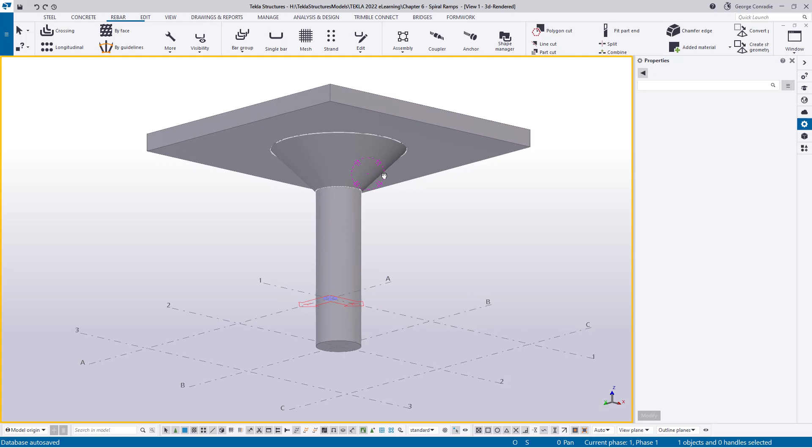In today's video, we're going to look at conical column headers or slab thickenings for the column header. If I rotate my 3D view, we can see what we're dealing with. So we've got a column, 1,000 millimeters in diameter.

Above it, we've got a column header, a shear column header. I've used the ELD in the profile catalog, so if we click on it, it's under circular sections ELD. Instead of having an elliptical shape, I've made the D and the R the same value so they turn out round. It's 1,000 at the bottom and 3,000 diameter at the top. Then we just have a simple slab on top, 400 millimeters.

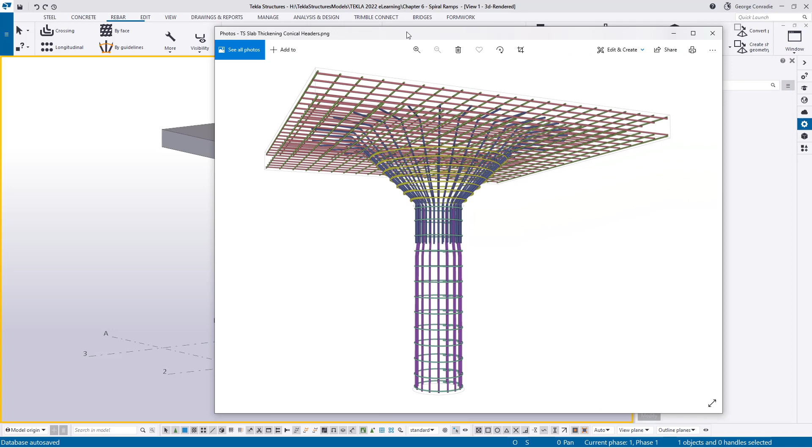So we're going to attempt to reinforce that. What I'll do is drag in an image. This is a screen capture from when I did my prep for this video, I just grabbed the screen capture because I didn't really have a good example.

Basically what we're dealing with: we've got a column with some ligatures around, and then the column has a cranked bar, and the main bars that go up the cone lap with the cranked column bars, and then it extends right through to the top layer of the slab, forming the third layer of the slab. We also have some distribution steel going horizontally around the cone.

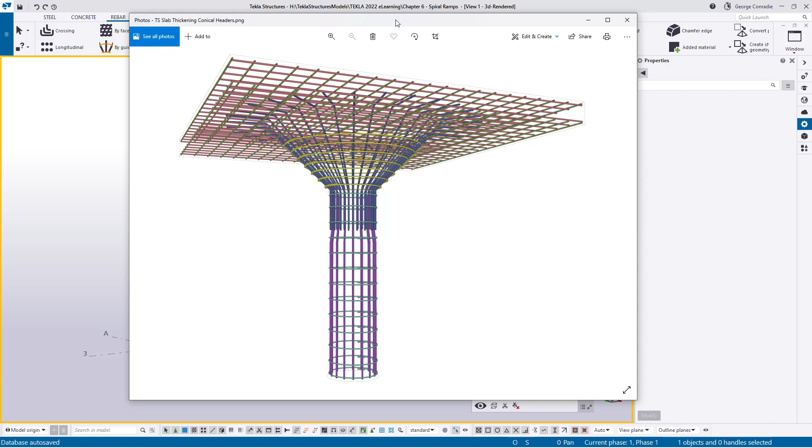This is quite a complex exercise in the sense that the geometry is not simple, and I am going to use all three rebar types - single bar, rebar groups, and rebar sets - to accomplish this. Sometimes you do need to revert to more than one method to solve your solution. Let's see how that's done.

I think for this exercise, what I will do is start with a cone - we'll do the conical part first. I'm going to open up a view on gridline 2. If I go to my views, I'll just grab gridline 2.

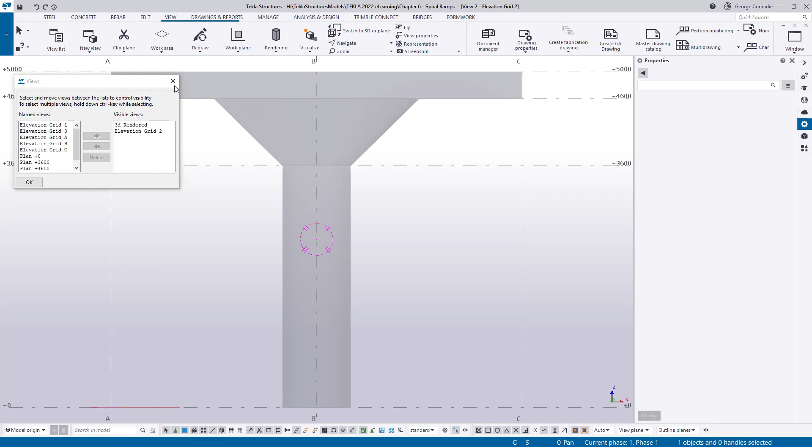Also, if you look at the way I've put out the grids, we've got a 0 level here, a 3.6 meter at the base of the cone, and a 4.6 meter, which is a meter difference to the top of the cone, which is the soffit of the slab, and then the slab at 5,000.

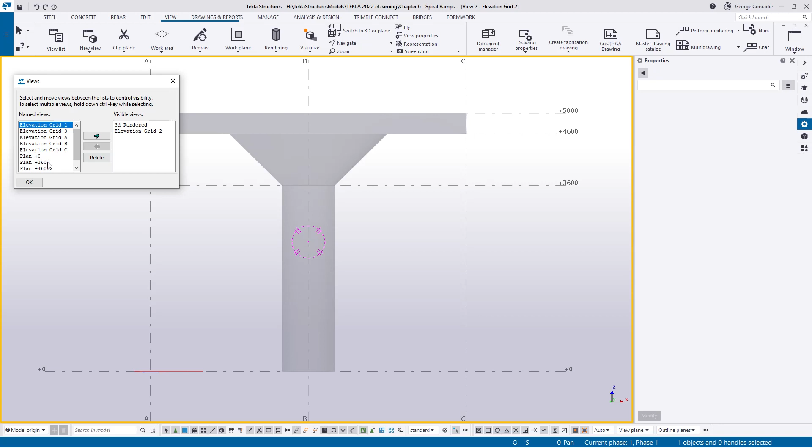So to work with the cone, I'm also going to open up a layout on 3.6 and 4.6. If we go to the view list, we'll grab 3.6 and 4.6 and drag them across as well. Then what I'm going to do is go back to the grid line 2 elevation.

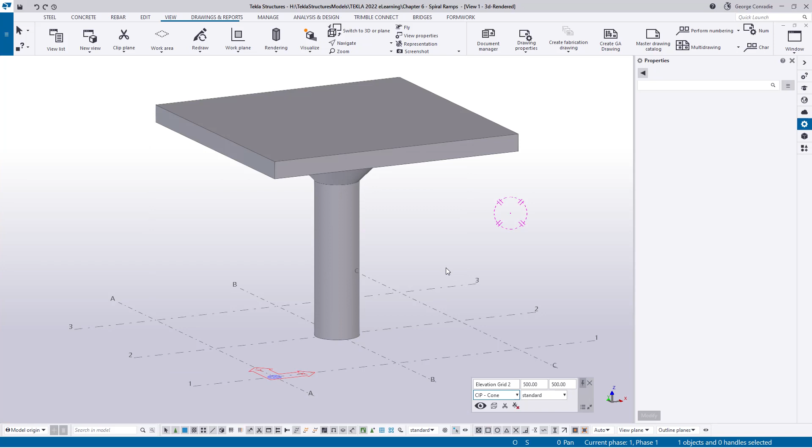Under the visibility group object, I will also isolate the cone, so we only see the cone. We might as well do it for the other two views as well - make sure we've got the cone in here, and also in this one. Great stuff, and I'll go Control P.

So in this one, you can see this is 3.6 - we're basically working at that level where that dotted circular line is. And if we go to the elevation on the side, this is the 3D view, I'll kill that one for now. At 4.6, we're basically working on this level of the outer cone.

Right, okay, so let's go to the elevation - that's the easiest place to start. What I'm going to do is start with the horizontal bars. Now with the horizontal bars, it's going to be 12 millimeter diameter bars.

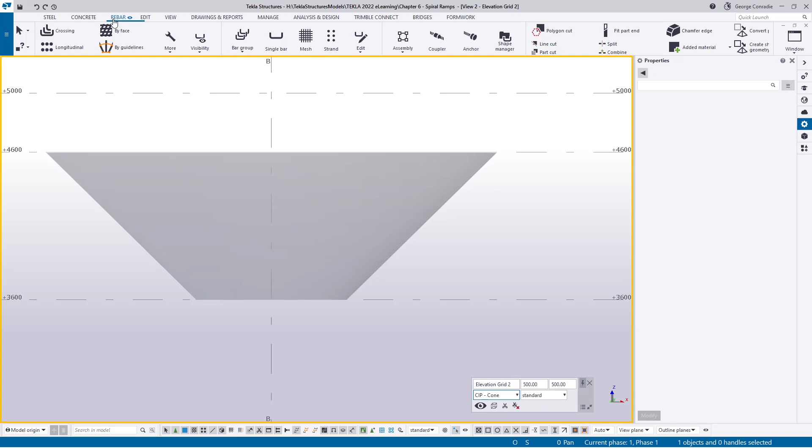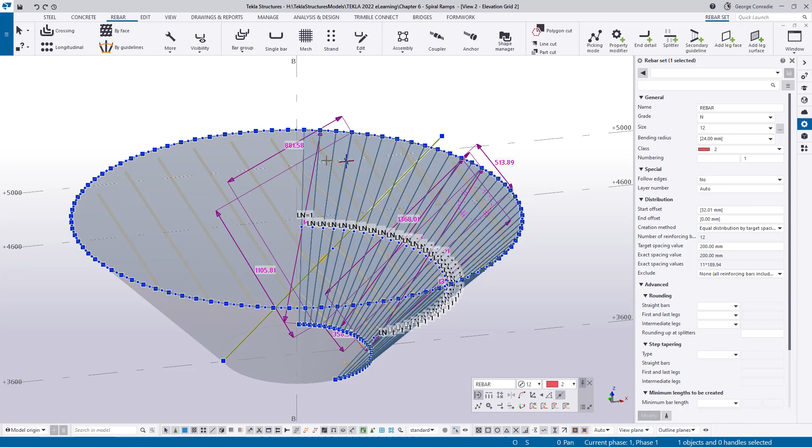It's quite tricky because if we put in a crossing bar and just click there, we get a really funny shape. You can control it by moving your offset around, but it generates - let me show you. If I go here and switch on our visible leg visibility and click on the bar, it does generate an immense amount of faces, and that's what we want to manipulate at the end of the day.

So what I'm going to do is just delete those. I'm going to go Control P, so we're back on the elevation straight up again. For this exercise, I'm actually going to use by face. When I go to face, you can see as we hover around these faces, it actually gives you the direction of the bar.

If we pick the one just off center from this and hover towards the bottom point, you can see we get vertical bars. Or if we go towards the side, we get perfect horizontal bars.

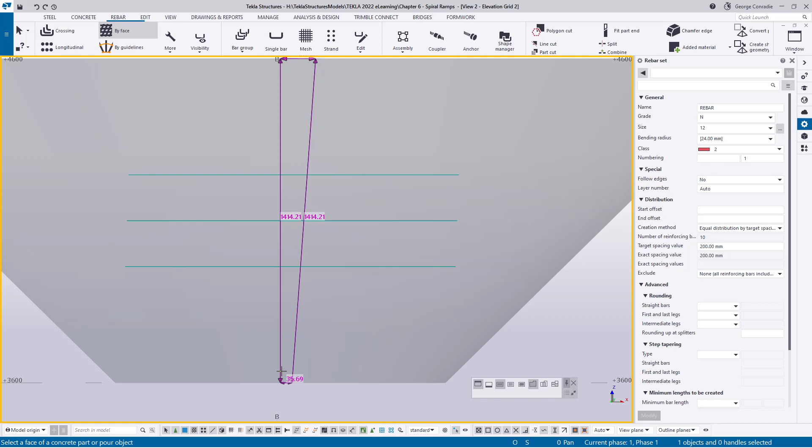Now, if I click that horizontal, Tekla will generate, and I'll just quit out of the command there. Tekla will generate this sliver of reinforcement because it's only picked one face, and that is okay.

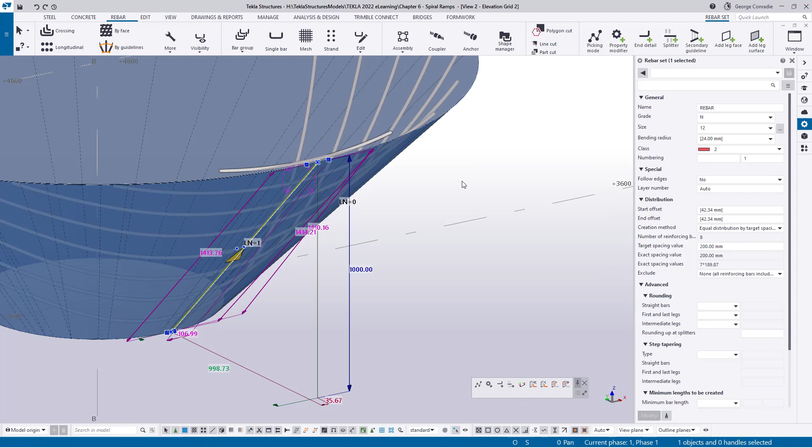Now that we've got that selected, what we can do is go up to the top here and say add a surface. If we click on the outside surface, we then add surfaces right around. The important thing is we now have two faces on top of each other here. We've got the surface here, but we've got the face here, so we've got to click on the face.

Just make sure that you select the actual face. If you click on it, Tekla will tell you it's actually a rebar set leg face, and you can just delete it. And that was the wrong one.

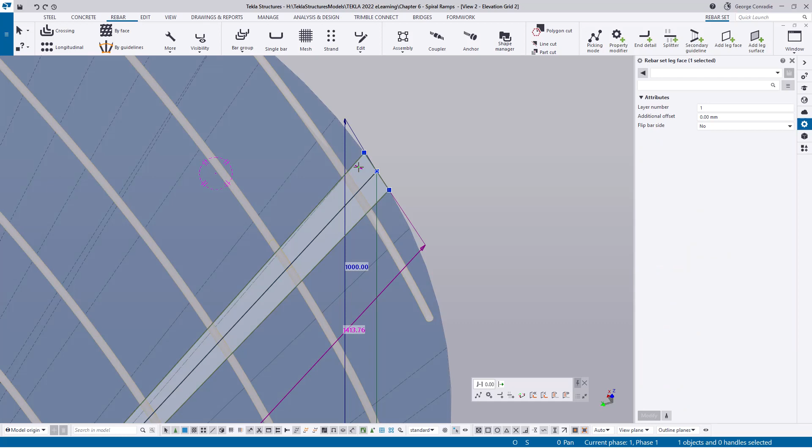So if we just click on the bar again, it's so important to make sure that you select the right one. It will actually highlight. So if you look at that, you can see it's actually now highlighted. And then if you delete that, we're left with the surface with the bars in it.

And the reason why they're so funny is because the guideline is at the slope of the cone, and rebars always produce perpendicular to that. So that's the next step in this exercise. We need to fix that up.

So if I just do a redraw to get our cone again, and I click on our rebar, we can see the first step, I'll switch off the faces, is to get that guideline perpendicular. So what we can do is in this elevation, we can just drag it so it's perpendicular or in line with the grid line, vertically up.

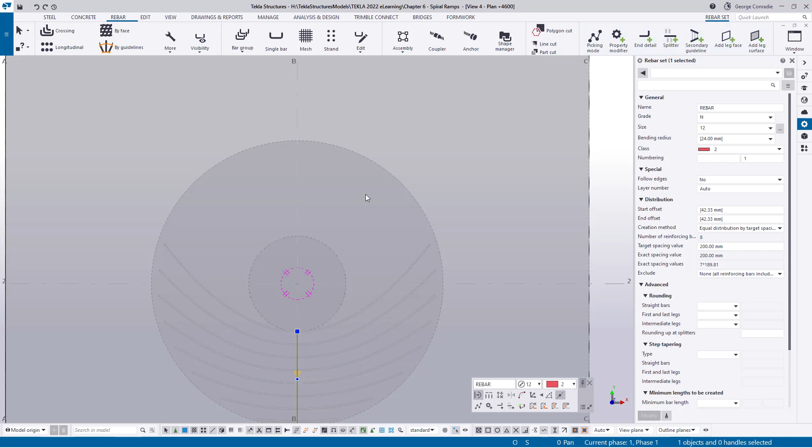And then if we go to the top view of the 3.6 level, this view, if I grab this one, it is the bottom. I can grab it to the middle of the column. And then if I go to the 4.6 meter one, I know it's this outside one. I can drag that to the center too.

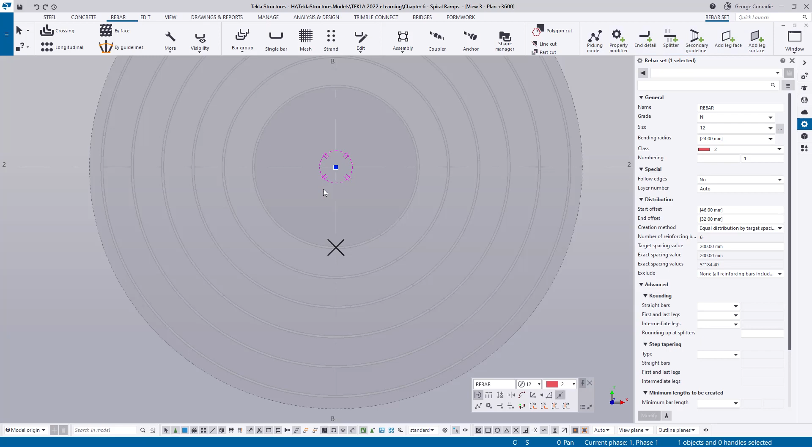And as soon as I do that, you can see how nicely that reinforcement's actually, and I'll just do a redraw, how it's gone horizontal for us. So if we look at the elevation, we can now see we have this guideline exactly in the middle of the column going up and down. So all this reinforcement is then being created perpendicular to that, and that gives us this perfect circular reinforcement.

Now, at this point, we can't see where it starts and ends, so it's a perfect circle. We need to split this up into workable bars.

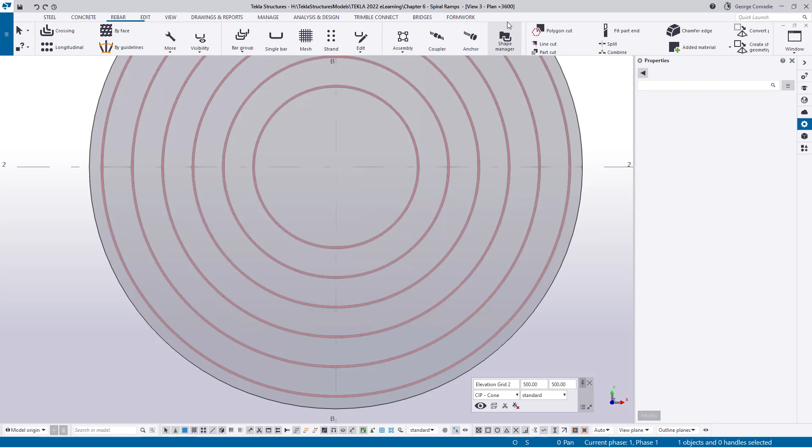So if we go to level 3.6, which is the bottom of the cone again, see my title bar at the top there, we can now split this. So if I click on this bar, I can then go splitter, and I can make sure that I load my defaults. I want a standard lap.

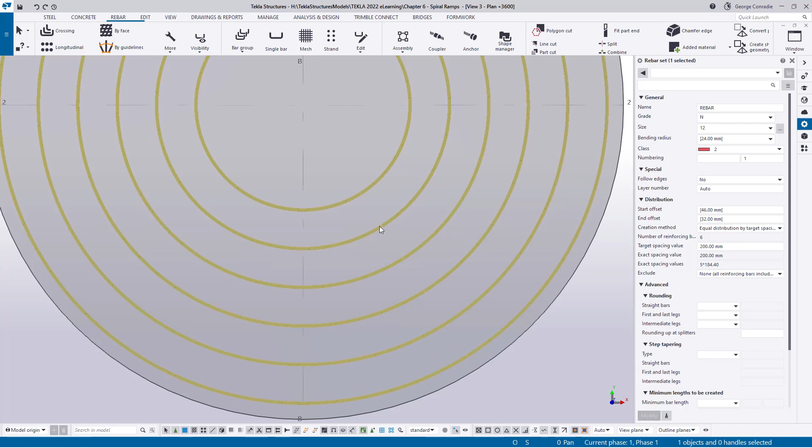Now what I can do is, actually we can't see the bottom of the concrete here. So what we can do just before we split it, let's just temporarily select this reinforcement and say give us 150 offset on either side, just so we can see the concrete line. As soon as I do that, I can see the concrete line. We'll rectify that in a minute.

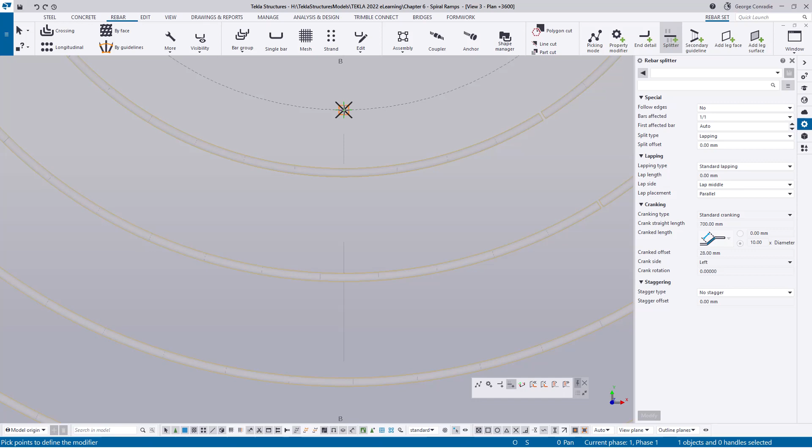So if I click on the reinforcement now and I go to splitter, I want to split the bottom, start at the bottom, so make sure you're on 3.6, and then we can pick this point of the concrete here. And before we pick the other, maybe I should just mention now, the reason why I can actually split is because I'm in the multi-point mode.

Maybe what I should do is just show you, if you are in this mode, you cannot split. Even if you click, Tekla doesn't do anything. You have to be in multi-point mode when you're working with tapered or guideline bars.

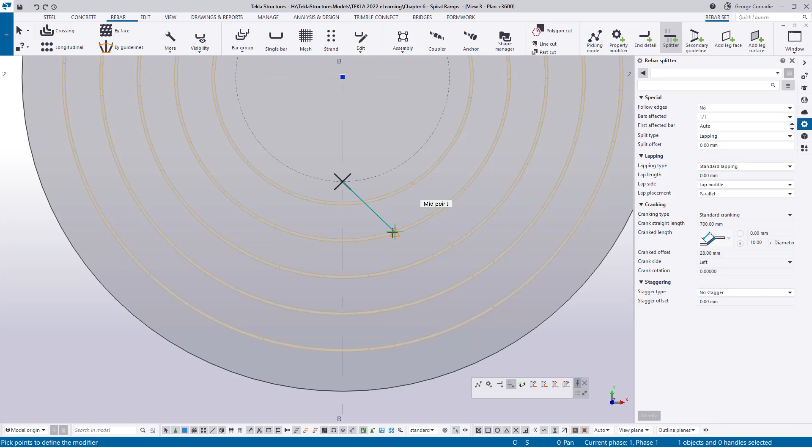So if you're in multi-pick mode, we can now select the bottom because we know at 3.6. Click the bottom, and to click the top one, we want to be in the right Z direction, so we flip over to 4.6. And now if we click there, we know we're going to click at the top. So as soon as I click there and I say OK, Tekla's now split those bars for us.

And if I just go into 3D quickly and have a look at it, we can see that these bars are all now been split. And now we can do the same on the other side.

So I'll go back to my 3.6 level, click on the bar, click on the splitter, start at the soffit of the cone, flick over to level 4.6, click on the top of the cone. Middle mouse button, now it's split. Now if we look at this in 3D, I'll just switch my highlighter off for a minute. If we look at these bars in 3D, we can now see how nicely they lap.

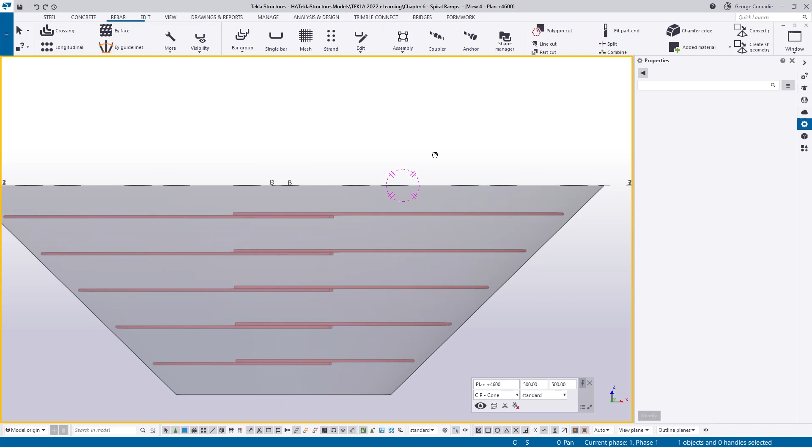And I think what we need to do now is just go back to our elevation, go Control P to get it perpendicular to the plane. And now what we can do is just click on the bar and say we want 100 millimeters from the top and from the bottom. It gives us a bit of workspace there.

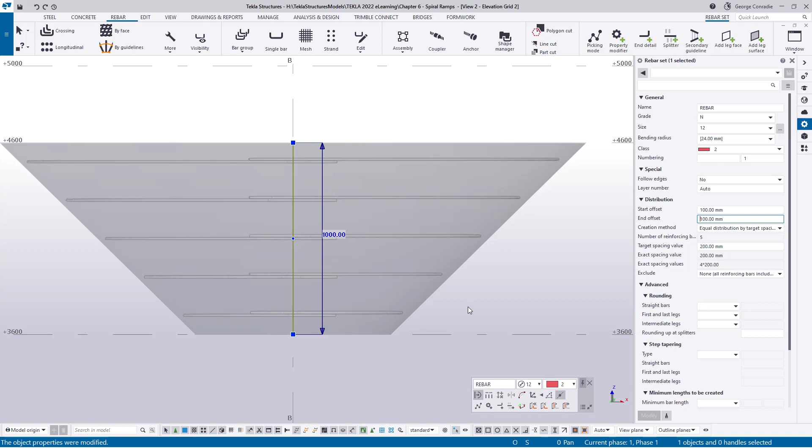The other thing we need to look at is these spacings. At the moment we've got 200, but the 200 will be calculated upon this vertical guideline. The engineer might ask for this distance. So what we can do in here is to just try 150 to start out with as a slope distance.

And now if we go F and measure a distance from this point to this point, we get 188.56, which is closest to 200. You know, you can play around until you get 200 there, but you're going to drive yourself insane. The engineer is asking for 200 as a max, so he'll be quite happy with 185, and the bars work out nicely.

Now, with those bars done, we can now click on the cone, right-click, inquire, go to cast unit, and have a look at the bending schedule. Now, in here, you can see we've generated a shape code that says RS. And the size of the bar is a 12mm bar. I wanted 16, so we need to go and fix that up.

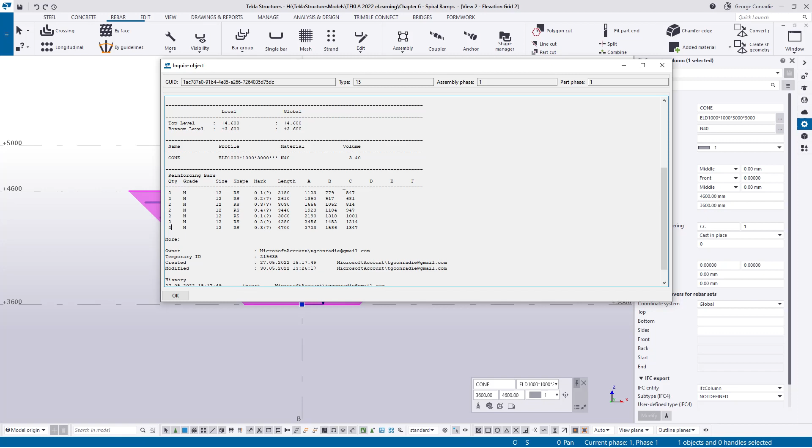And then you can see they're all grouped by 2, 2, 2, 2, which means that Tekla was smart enough to recognize that these two at the bottom, this one and this one, are the same. These two are the same, these two are the same. But that's as much as you can optimize, because the radius is different. Even if you apply a tapering rule, it will not work because the radius on each one of these is different. And those two are already the same, so you can't further optimize this. So it's really good the way that Tekla deals with this.

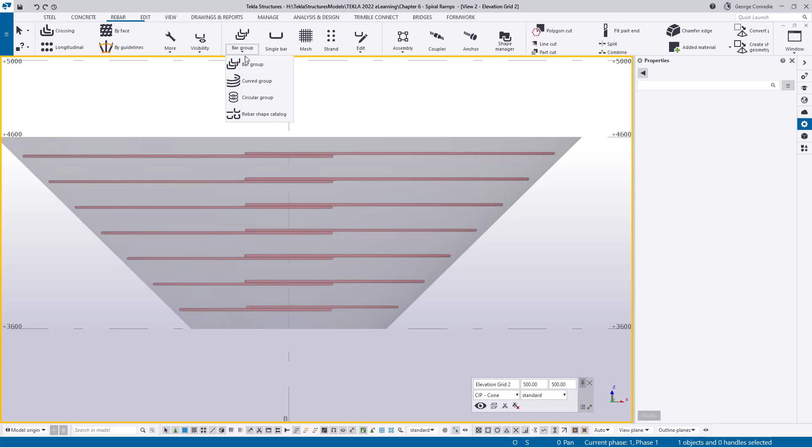But that is my sort of take on how to deal with these sort of bars. It's a bit of a workaround by starting with a face, then adding a surface, and then deleting the original face to get this. There is no other way that I've found with rebar sets that you can easily get around that solution. Rebar groups do not provide you with the solution. These group bars and circular bars are linear bars. They have no tapering option.

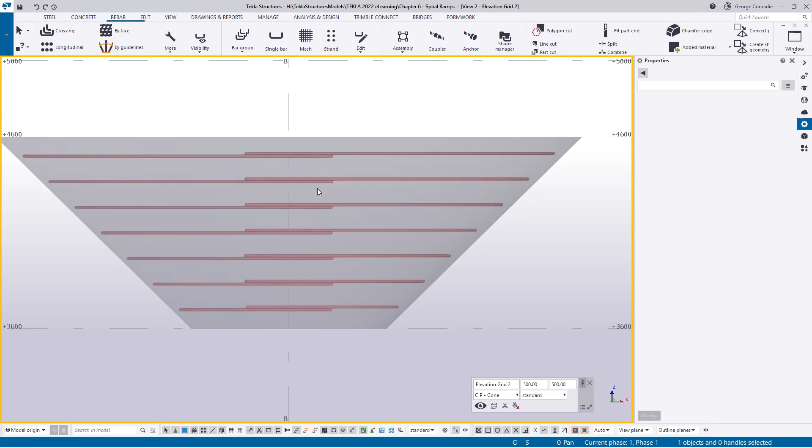And even if you do guidelines, it's a bit of a problem because your guidelines don't really want to go right around the column. So I found this a very good way. It's also the only way that I could come up with that actually generates exactly the same bar per plane. So with that said, final tweak is just click on it, and then we'll go for a 16mm main bar, and I am going to change this to a different color, let's make it class 8, modify, and we're good.

Now the next step with this is to do our main bars. It's the bars that will be radial around the cone, and for this I'm going to stay in this elevation, and I might just add all the elements to it. Control P, so we can just see what we're doing. Now the first thing I'm going to do is draw a construction line, and I'm going to make sure that I've got enough extension, like 1000mm, and a solid line so I can actually see it.

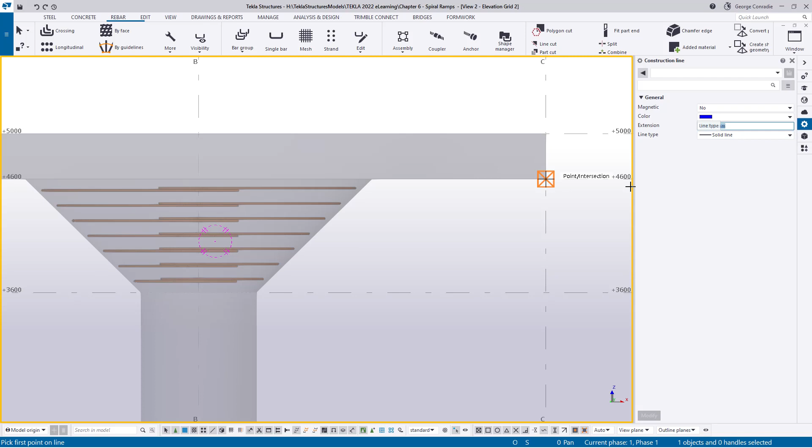And then I'm going to pick this point, and I'm going to pick that point. Now that construction line will be drawn on this plane, the plane that the grid is in. If we just flick around, we can see where it's drawn it on that plane. We just mark it in case it doesn't show up on the video. But you can see it's actually drawn it on that plane because we were in Control P. And the reason why I need that is because I need to see the extents of this conical bar that I'm going to put in. So for that, I'm going to use a single bar. So we use the rebar sets here.

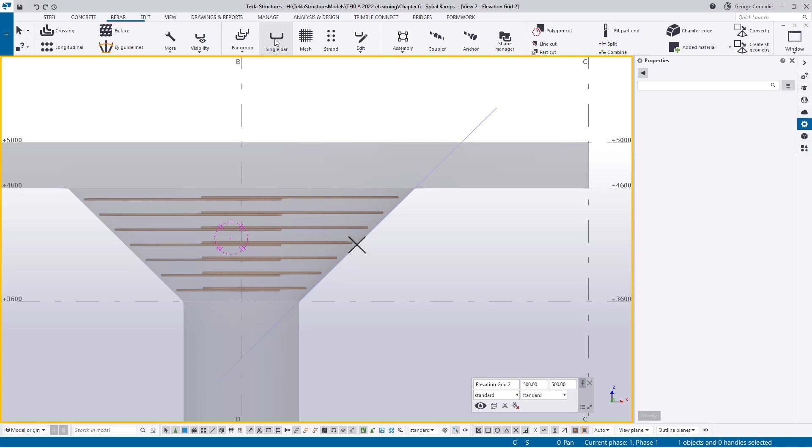Now this one is most easily done doing a single bar and then using the array tool to radial it around. That's by far what I found the most effective way to deal with this. So if we go to a single bar, and then again we just go and load our property. So this time we'll go for a 24 main, and for the class we will go say 7 and leave that alone. Let's leave all of this alone. We'll see how we can set those.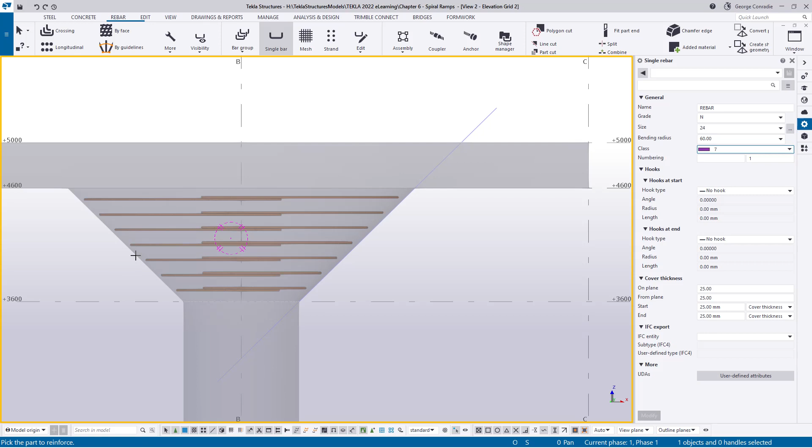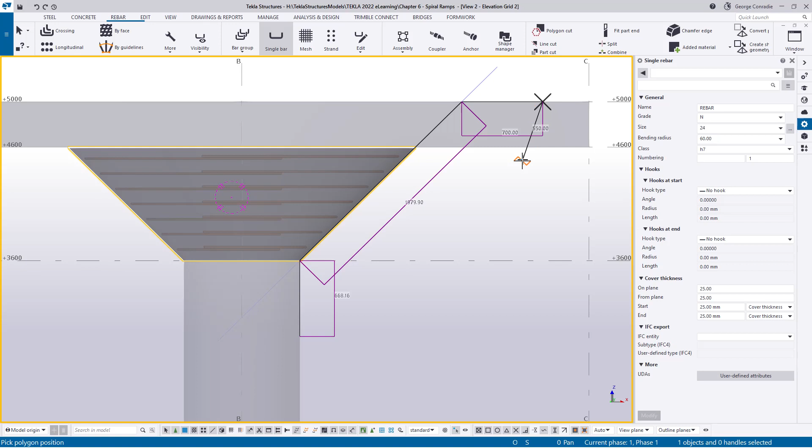Now the part to reinforce is the cone. So I'll just put my highlighter on again so I can see what I'm selecting. There we go. Click on the cone, and then Tekla is asking for the shape of the bar. So the shape of the bar is, we're going to start with a rough dimension here, or a rough leg there. We're going to go up all the way to the top of the slab, and we're going to give it a rough dimension there. And then we're going to middle mouse click, and Tekla will draw a bar that looks like this. Now in here we can already see we've got some cover issues.

This needs to be the opposite of what it is. So if we click on the bar, we can see that's 25, 25, 25. Now this is leg 1, leg 2, leg 3. So we know leg 3 is correct. So what we can do to start out with is, on the on-plane settings, I'll just move my mouse a bit, we can say that the first leg's got to be a minus 25. So is the second leg. And the last leg can be a plus 25. So as soon as I do that, it's now got the cover correct. All we need to see is the dimension value.

Now, I anticipate putting in 16mm diameter bars for the ligatures in here. So we need to add 16 mils to this. And this one is a bit different. So if we grab the first one plus 16, for the first one we can do 41. So instead of saying 2 times 25, what we can do, and I'll move my mouse again, is we've got minus 41 for the first one. For the second one, we need the minus 41 plus another, and I've actually made a mistake. Beg your pardon, it's 25 for the cover plus the bar diameter. Let me just clear all of this.

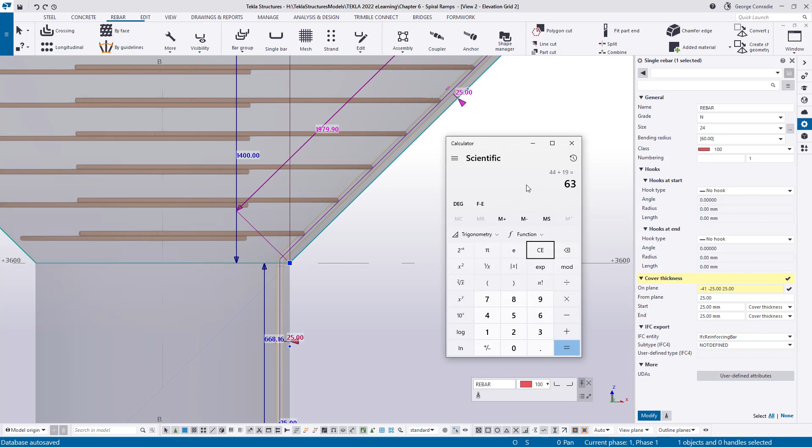So it's 25 for the cover plus I added 16. That's incorrect because the 16 bar has got a 19 diameter. So it's plus 19. So the first bar will be 44 and then plus another 19 for the second one. That's 63. Now, how did I get to that? Let's just first key them in before I forget them. So the first one is 44. The second one is 63. And the last one for now is 25. So as soon as I enter that, if I click on the bar, we get the 63 over here. We get the 44 there.

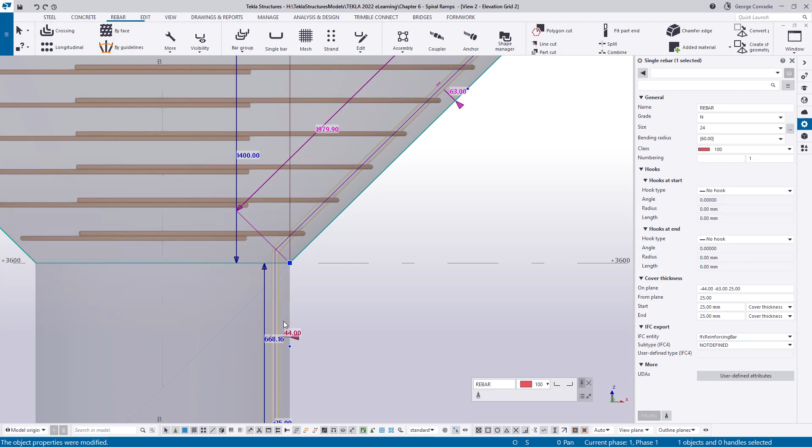Now this 44 is made up by the 25 cover plus the 16 bar, which is a 19 diameter. So it should come in right in the inside of that leg. This side I use two 19s, and the reason for that is if you look at this lap here, and I'll just rotate the bars slightly, you can see that Tekla actually stacks them on top of each other. So to miss them, I've just added another bar to it, so it should run up the inside of the top bar. All right, so now at the top, we'll deal with that cover as soon as we put the slab reinforcement in. So for now, let's just see what that bar looks like from the top.

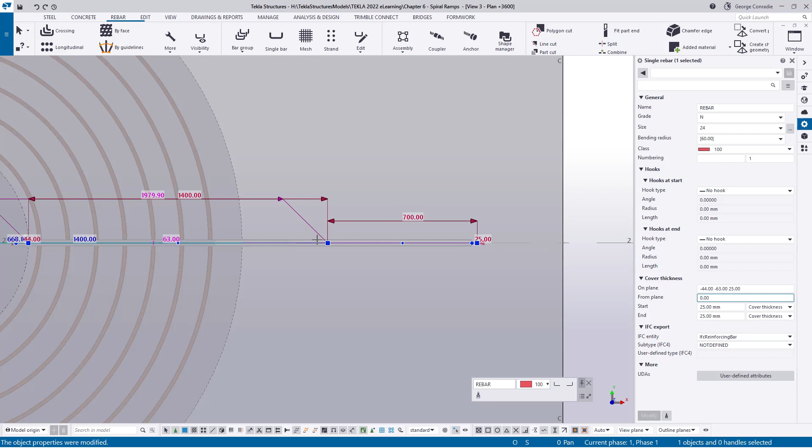So if I hover over to my 3.6, we can see this bar is actually sitting off the grid line. It's got a 25 from plane, so the from plane we can make 0, so it's sitting straight on the grid line now, and the on plane dimensions remain. Now the only thing we need to look at is the leg length. So at the moment, we don't really know what that is. It's just arbitrary dimensions. So what we're going to do is we're going to force them. So in the start and end, we're going to pick it as a leg length rather than a cover. And for the leg length, I'm going to force it as an 800 millimeter leg length and an 800 millimeter leg length.

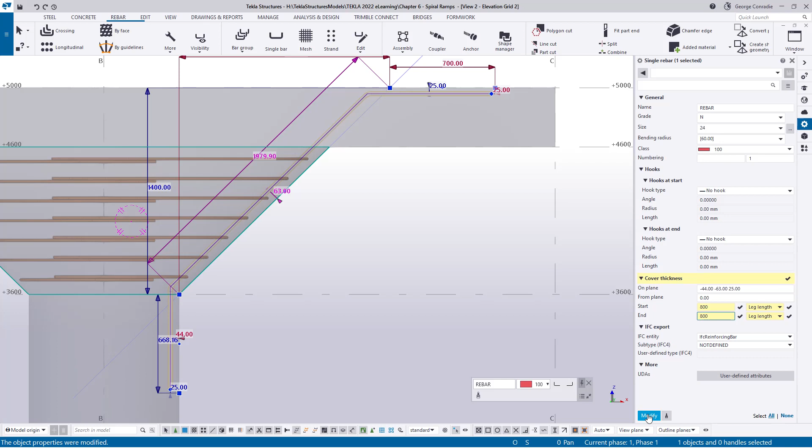So as soon as I do that, Tekla now fixes this leg and that leg to 800. So if we click on the bar, right click and inquire, we can have a look at the bending schedule. So the start leg is 800. The diagonal intermediate leg is 1863. And then the last leg is 800. And these two values are the offsets to create that.

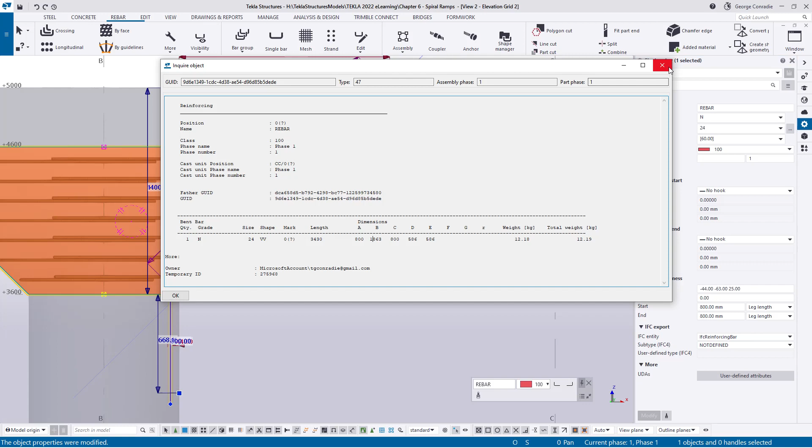So that bar is now 100% correct, and we can look at the final cover at the top of the slab as soon as we put in the slab reinforcement. So to get this bar to radial now, what we can do is again flick over to our 3.6 level. I'll do a redraw and just click on that so it can repaint itself. So for this, the best way to do this is to use the radial array tool. And the reason I'm saying that is any changes made to this bar will be reflected to the others.

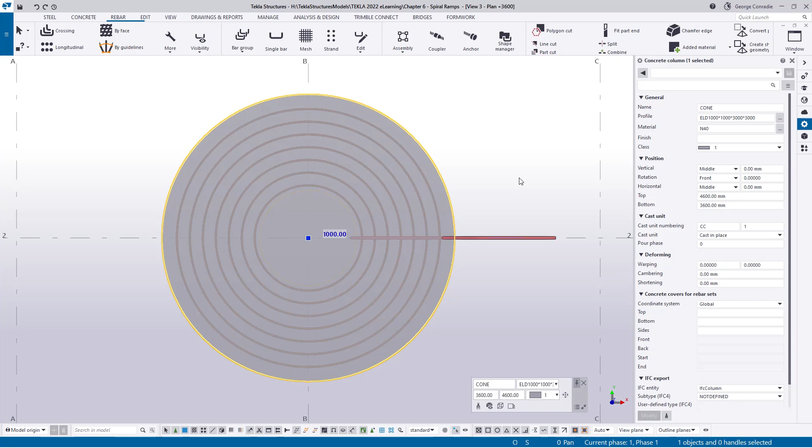Now, the tricky part with this is that the engineers asked for these bars to be radialed around this cone at the top at approximately 300 millimeter spacing. So that will also be a maximum, not a minimum. So if we look at this cone, if I just click on it again, we can see that the top is 3 meters and that's a diameter. Now, if I just grab my calculator across here again, and I'll just clear everything.

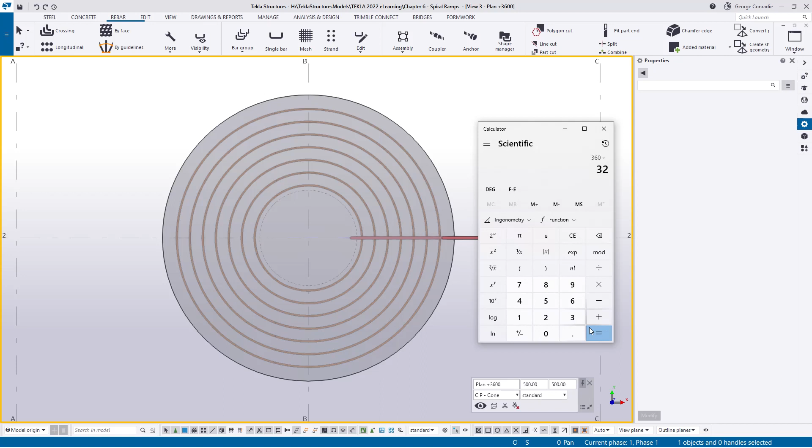We know from school that pi times diameter will give you the circumference. So if we go 3000 and we times that by pi, that will give us the circumference. And if we divide that by the 300 spacing that the engineer wants, we are left with 31 spaces. That means 32 bars. Okay. Now knowing that we're dealing with 32 bars, we can go 360 degrees divided by 32 bars, which gives us an angle of 11.25 degrees. Okay, so let's see how we can use that.

So if I go to our applications and components and I type in array, we can see the radial array tool here. If I double click it, we can make some changes. So the first thing is we know we've got 32 bars, so we've got to generate an additional 31. And the angle, as we've just worked out, must be 11.25. And then we can apply that and say OK, and now Tekla is asking, pick the objects you want to copy. So I'll hover over the bar, click the bar, and then middle mouse.

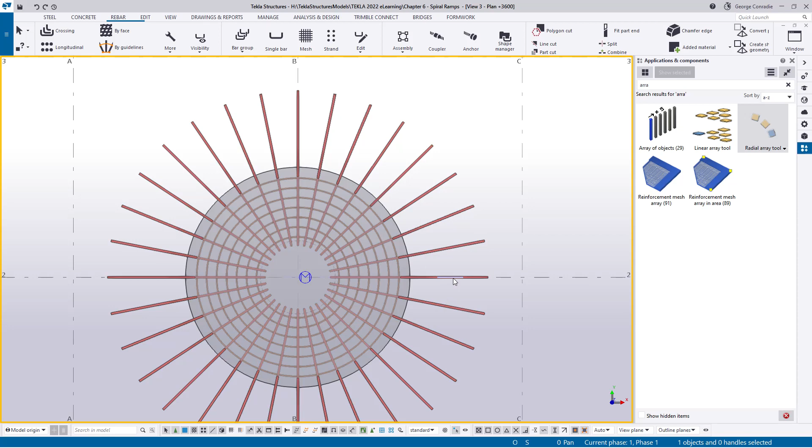It asks me the origin. We'll pick the center of the cone. The X direction is this way, and the Y direction is that way. And there we go. It's now generated all those radial bars based on this bar. And remember, any changes we make to this bar will be reflected there. Let's start by taking this bar, and I'll go back to properties and just change its class to a 4 and say modify, and you'll see how that works. And just like that, it's updated all the other bars. That's why I say that's a very effective way to use this.

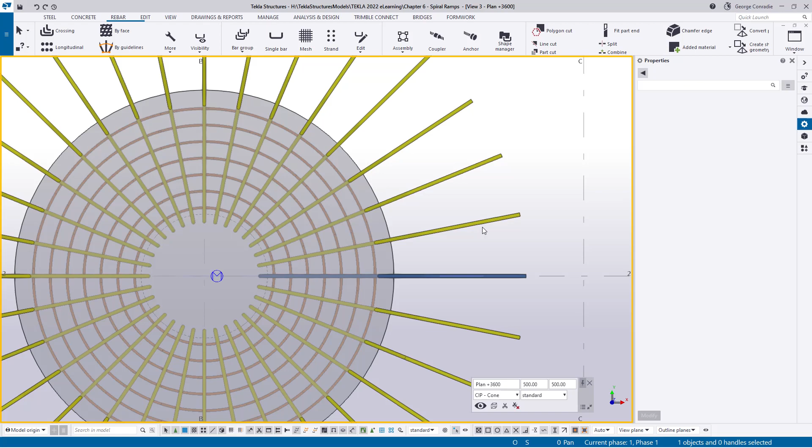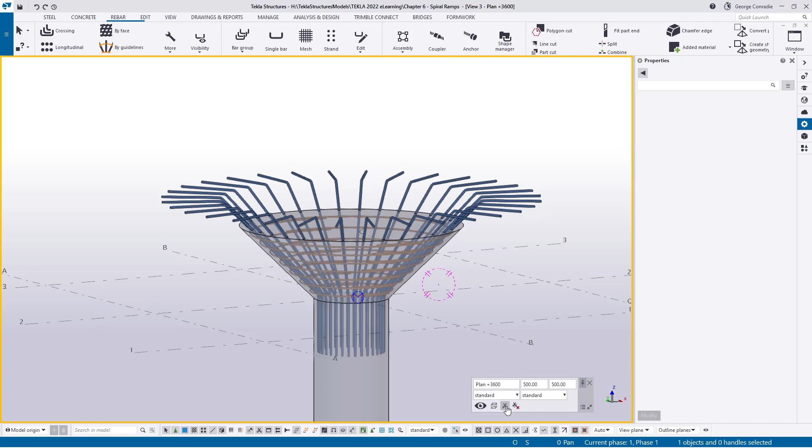Okay, now that we've done those radial bars, we can actually see how nice that's looking. We can just get rid of this construction line. And what we can do now is quickly show all our elements. And we've got a depth problem here. If we put on the scissors, you can see where it's cutting it off. That's why we're not seeing the slab. So I'll flick across to the upper view. And this view, I'll just turn it around a little bit. And then what we can say is give us a crossing bar.

Now I'm back to rebar sets. And this time I'm going to say give me a 20 millimeter bar. And I'll make this bar green. And I will use the 100 offsets either side again. And then for the creation, I'll just go for a target spacing of 300. Simple as that. So we'll leave it like that. I'll hover over the slab and I'll pick the top and say OK. I'll hover over the slab again. I'll pick the bottom and say OK. That gives us our two top layers.

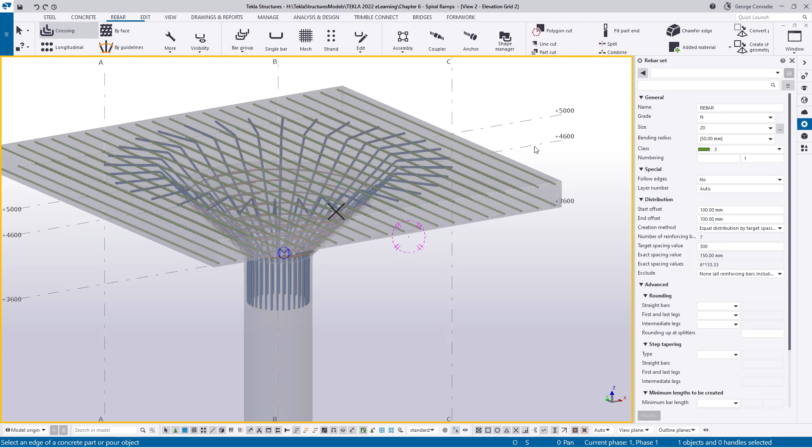You could also obviously use by face if you want. And then we can hover to the other side. And this time I'll change my color to red. I'll pick the top and say OK. And you can see how Tekla deals with layers. Click on the slab again, click the bottom and say OK.

And just like that, we've got our two layers ready to go. Now, if we go Control P and look at the elevation again, we can see the mesh with the cover. So the first thing I want to do is I'm going to flick these bars around. I'm going to click here and down in our contextual toolbar, I'm going to say move this to the outer face. It swaps those two layers around. I'll click on this bar, move to the outer face. It swaps those two around.

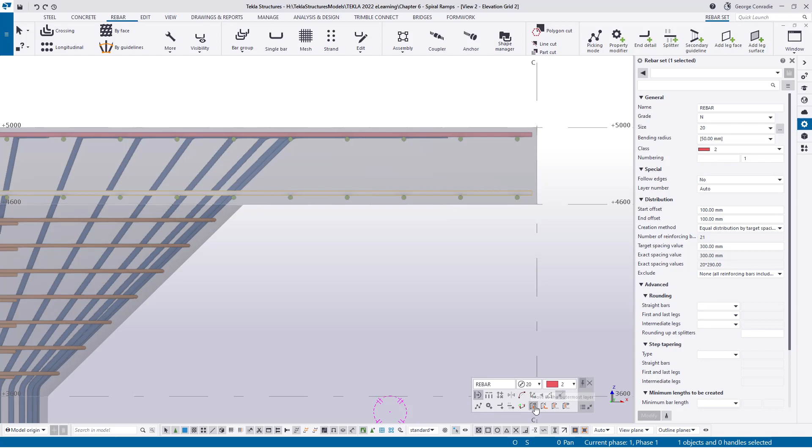Now, you can see this is the array, that's the component, and this is the bar that we generate our information from. So it's important that if you want to change this, you need to change that single bar that we've put in. So yeah, we need to have more cover. I want that bar to slot in beyond the second layer here. So how do we work that out? Okay, this is how we work that out.

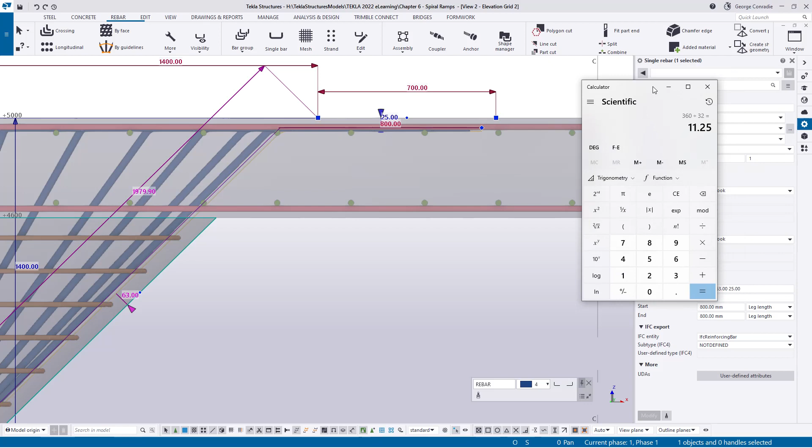Let me just go back to my calculator and clear everything out again. We know we've got a 25 cover from concrete. Plus, we know those are two 20 bars. So a 20 bar has got a 23 millimeter diameter. So we add 23, plus there's another one, add another 23, equals. So we've got 71 millimeter cover that we need to add to that bar.

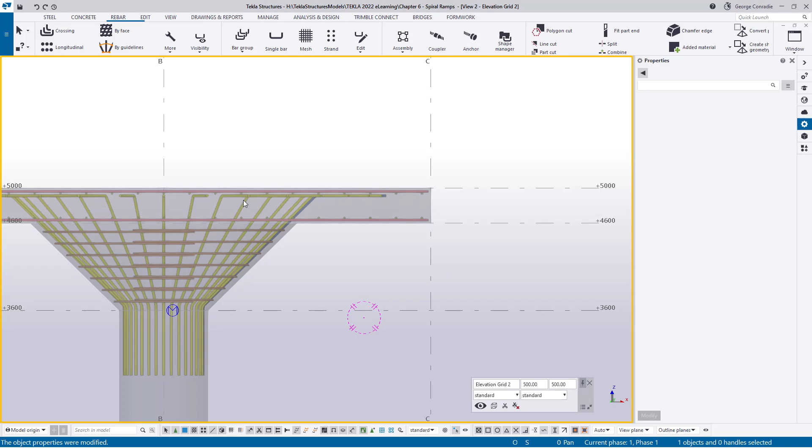So if we now click that single bar, and we know this is the third leg, if we go to the third leg, instead of 25, we plug in 71, we go modify, we can now see that that bar is now slotting in exactly underneath those bars, and it's replicated that setting right through the radial array. So all the other bars are perfectly aligned as well. Now that pretty much wraps that part off. So all we need to do now is look at the column.

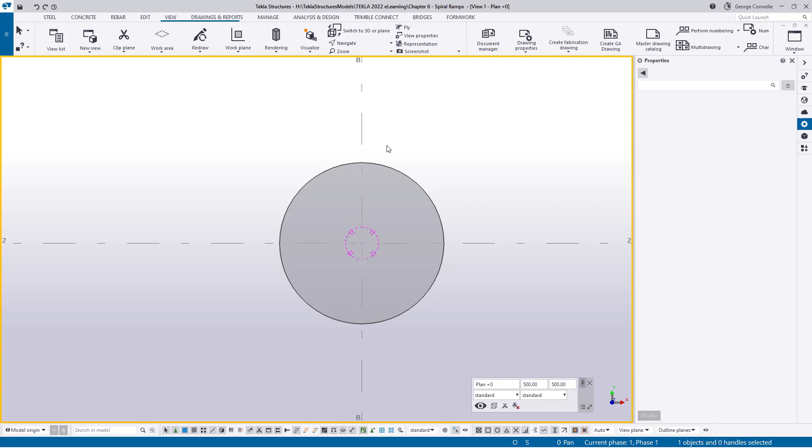Now for the column, I'm also going to open up a view at 0. So if we go to view and we go down to view list and we go down to 0, open 0, I want to draw the ligatures for the columns here. Now I use rebar groups for the ligatures of the columns. You could use the column component.

So if I just go reinforcement and I scroll down to our catalog and we look at our circular column reinforcement here, you could use this, but the problem is what we have if we go down to this view is we've got bars coming up here cranking into these. And the column only stops at the top here. You're going to have dramas, because you don't have an extension here. This is going to be a negative value because you want to stop it short.

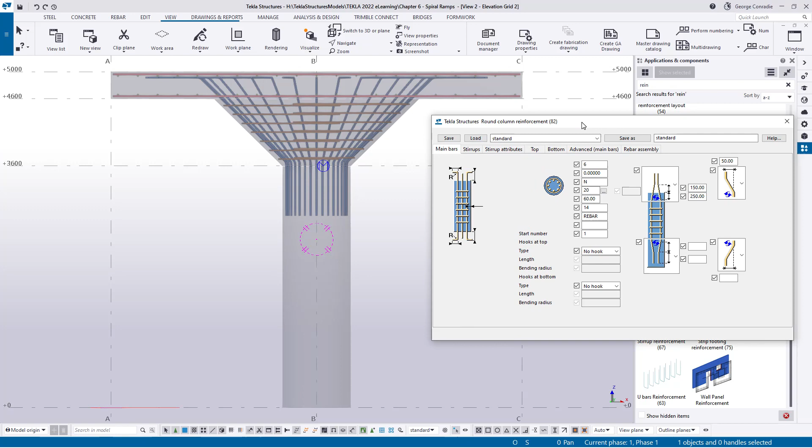And these values here require a value above. And as soon as you try and tweak this to suit that, this component will break. You'll get glitches inside your component. So this component is not suited for what we want to do here. So the result is we're going to do it by hand, and I'll show you a very easy way to deal with that. Okay, so let's go back to the 0 level.

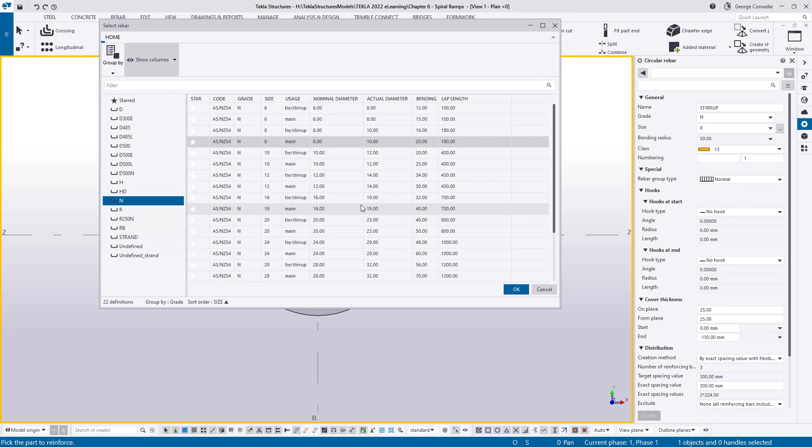And then what we're going to do is go to rebar, go to rebar groups, go to our circular bar groups. And then in the properties, we are going to pick a 16 millimeter tie/stirrup. I will make the color 5. It's a normal group. Let's add a 180 hook to that ligature so it can hook around the main vertical bars, and we'll leave the other settings as is for now, and the spacing as well.

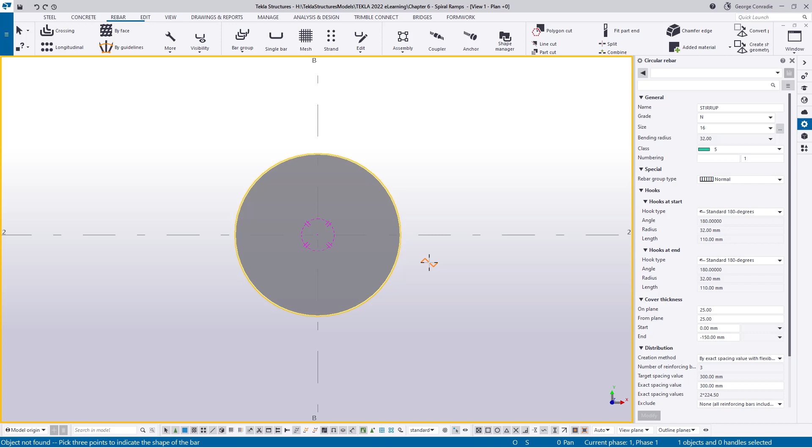So click the part we want to reinforce. Object not found. Click it again. Okay, now it's found. And now Tekla is asking for the 3 points for the bar. So we can click the first point there, the second point there, the third point there. Now it knows what the bar looks like. And now it's asking for the 2 points. So we can just start on this point.

And then I'll flick over into a 3D view. And it's very important that if you go up here, make sure that you snapped, you can see the blue ortho mode. Make sure you snapped in ortho until you hit the top, and you can see the 3.6 meter long column there. And once I click there, it generates the ligature for us. Now, we've got the two hooks overlapping each other here, and if we click on the bar, we can see what's happened here. So that's our start point of our bar.

And if we look at the start and end point definitions here, we can see that at the start it's got a 0. That's why it just starts there. And for the end, it's overlapping by 150, so it's going 150.

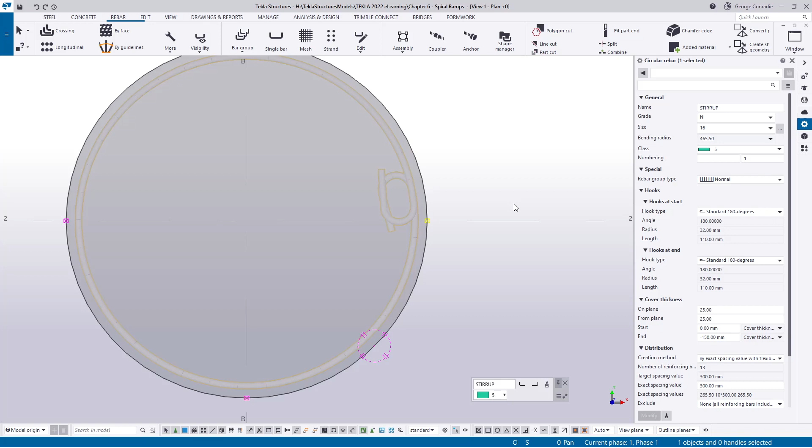Now we know a 16 millimeter bar requires about a 700 lap. So what we can do is say 700 divided by 2 is 350. So we go minus 350 for the start and then minus 350 for the end. And once we do that and say modify, we then get a situation where we've got these hooks centered with a 700 millimeter lap, centered about our start point when we started drawing the reinforcement.

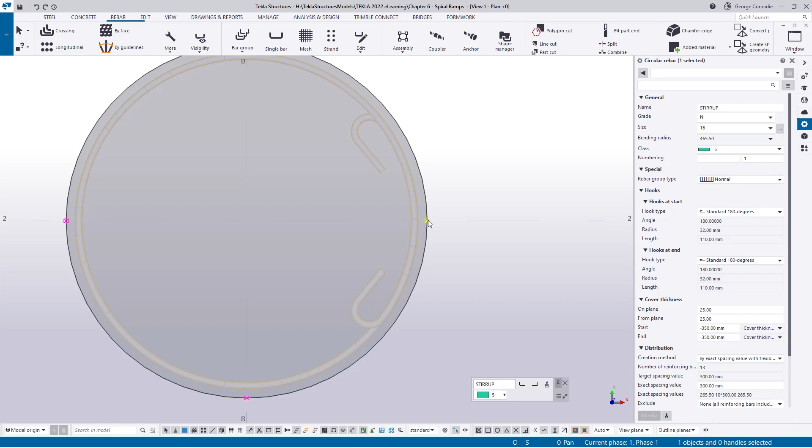Okay, with that done, we can now start focusing on the elevation. Just look at the set out quickly, the spacing. So first off, what I'm going to do is the from plane, that's the bottom and the top settings. I'm just going to make them 50. So it just drags the reinforcement a bit off it. And then for the spacing, I'm going to go exact spacing.

So now this is, I normally just wing it a bit. So what I know is that the cover for the lap length on the main bar is going to be plus minus 1,000, and the spacing over the lap is normally half the main spacing, being 300. So we're looking at 150. So I'm just going to go with 7 times 150. And then I'm going to plug in a value of 3 times 300 for the main. And then at the top, I know I want 3 bars at 100 millimeter spacing.

So once I do that, you can see we've got our 8 bars over our lap zone. This needs to be tweaked, and we've got our 4 bars over our top zone. So all we need to do is just fill in the blanks here. Let's try 5. No, and let's try 7.

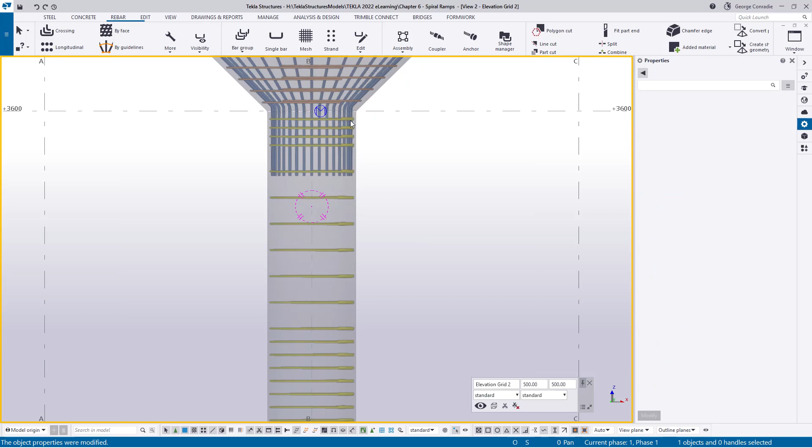And that's it. So now we've got our 4 bars at 100 millimeter spacing at the top of the column. We've got a spacing at 300 in the middle, and we've got our half spacings down the bottom where it's lapping with the starter cage. So now the last thing we need to put in is the crank bar.

And again, I'm going to do a bit of a strange one. I'm going to go for a single bar. I'm going to change the color to, let's take a radical color. Let's go yellow so it shows up nicely against the blue. It's a 24 bar, we're happy with that. And I'm just going to go back to the default settings. Cover 25. Okay, so let's just leave it like that, and we'll see how we can fix it.

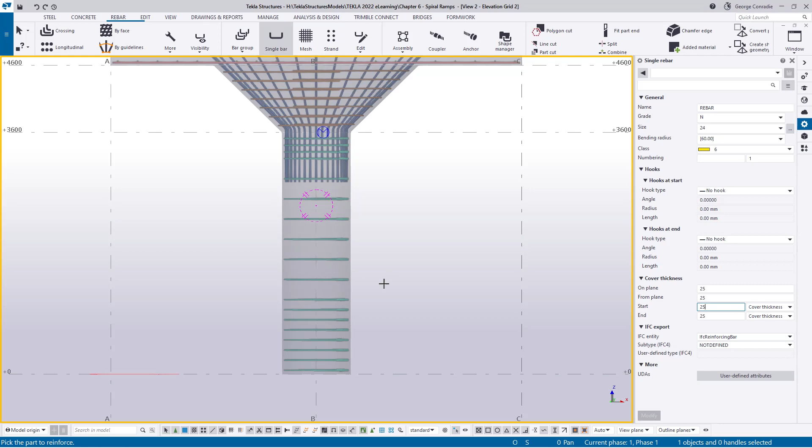So the part we want to reinforce is this column. We click on the column, and then the shape of the bar. Now we know we've got a crank bar. Now a crank bar's got 4 nodes, so let's just put them all in line and we can tweak them. So if I go here, start there, and I can go up to here somewhere.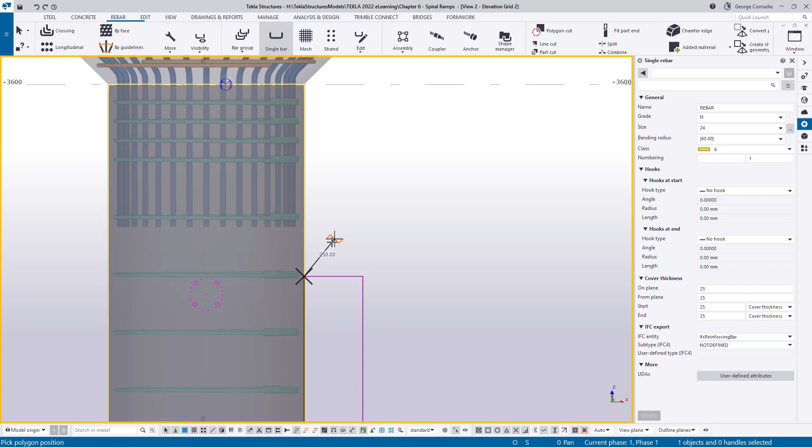And now I know for the crank part, that's going to be the next node. For the crank part, I know that it's normally 10 times the bar diameter, and the bar diameter is 29. So if we go 300, or if we use not the actual but the nominal diameter, it's going to be 240. So we can go to 250, for instance. You've got to apply your own standards there. And then we go to the top, and if we say middle mouse, we get a perfectly straight bar, but we've got 4 nodes.

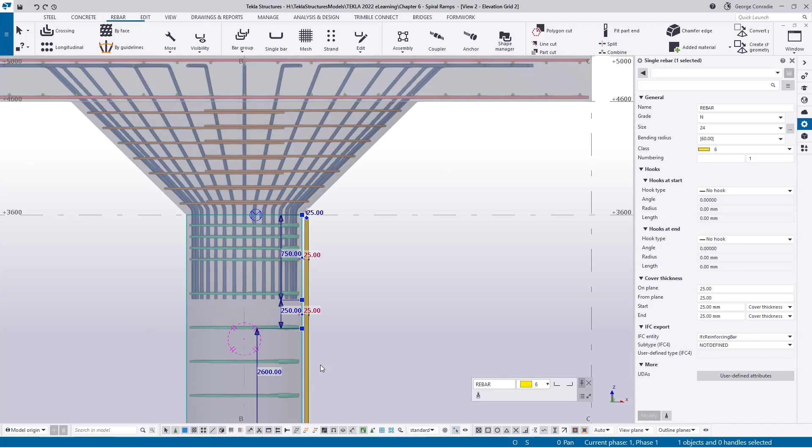Now the first thing we want to do with those nodes is push these 2 in. So if I highlight the bar, grab your alternate key, keep it in, and just select over those 2 nodes, it will tell you down the bottom you've got 2 handles selected. What we can do now is right click and say move special linear, and we're going to move in the X direction.

And how much are we going to move? First of all, we're going to move negative. And how much? We're going to move a diameter of a bar, and it's the actual diameter. So it's a 24 bar, which means it's 29. So if we go 29 millimeters there and we say move, we get the crank bar as we wanted. And now the last thing is we need to look at cover. So if we click on this, we can see this 25 is wrong.

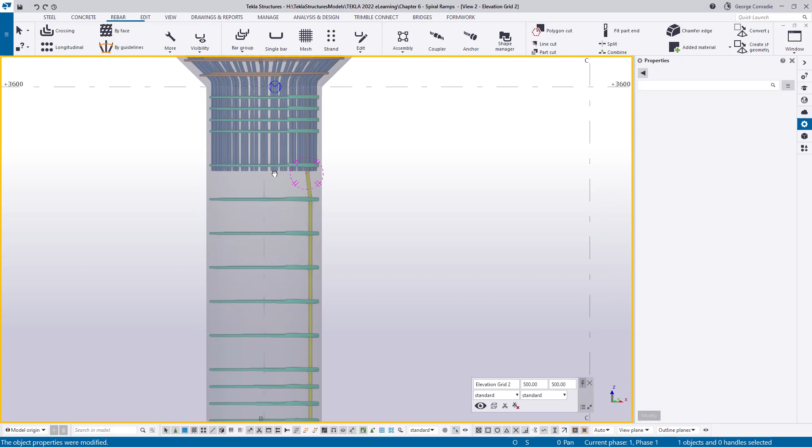That's got to be negative, and the negative is got to be 25 plus that actual bar diameter, which is 19. So that will give us 44, so it's 44 minus. As soon as I do that, we get this bar now. If we look in 3D, we get this bar sitting exactly on the inside of that ligature.

It's sort of sitting not in line with that bar, and the reason for that is if we take that bar, Control P, we go to a layout from the top, and then maybe what I can do is let's go for this layout, Control P, this 3.6.

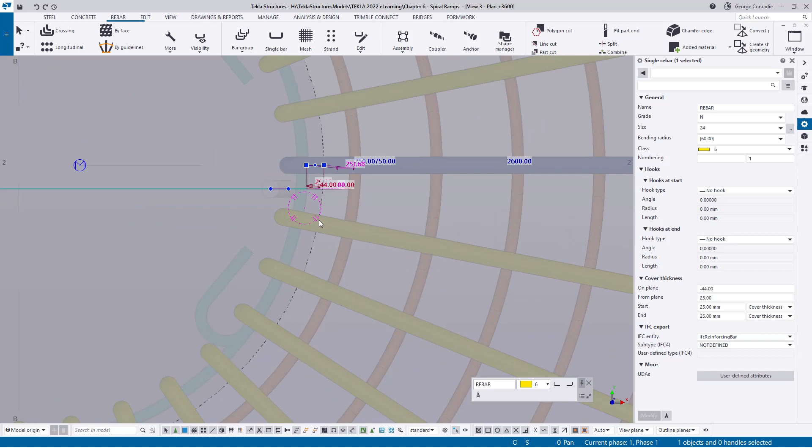If we look at it now, we can see this bar is actually sitting off the X again. So to fix that, all we need to do is go to the from plane value and make that 0. Now that bar is moved in onto the grid line, and if we look at it, we can see those two line up perfectly. The crank is also precise, and it sits nicely in ligature.

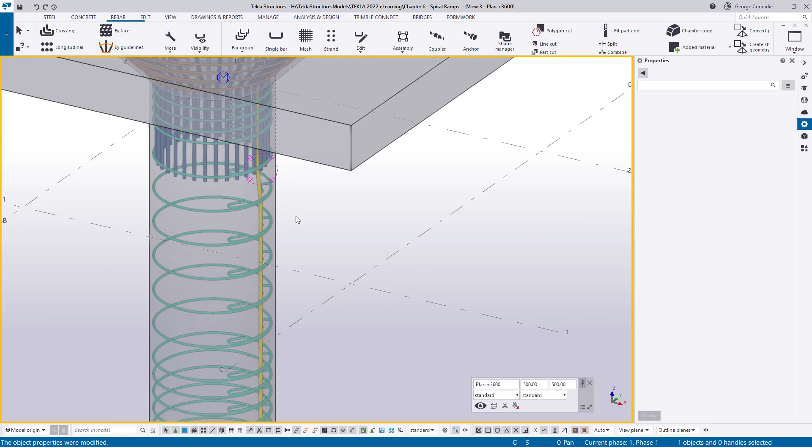Now the only thing that remains is the radial array tool again. So if we go back to our radial array tool, go in here, ARA, and we double click on our array tool. Now we know that there's 32 bars in here. The engineer is asking for 16 bars in here, which is also every second one.

It sort of makes sense what he's doing. So we need 16 bars in the column. We know the additional that we have, because we've already got one there, we need 15 more. And then the angle is going to be, it's quite obvious, double what we had before. So that's got to be 22.5.

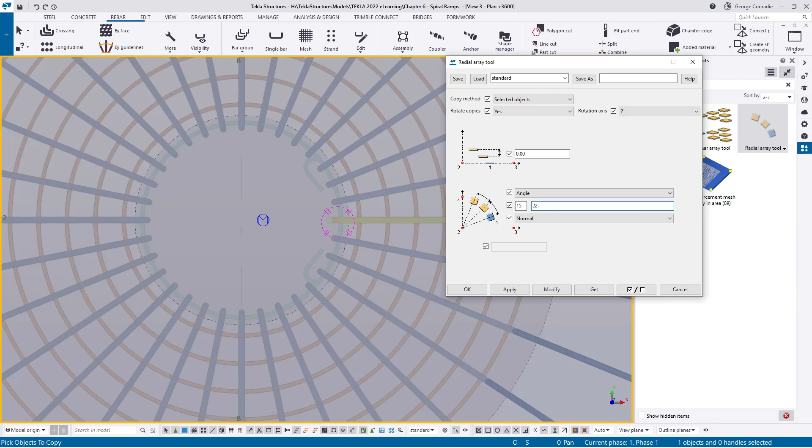And then if we say apply OK, Tekla is asking for the object to be arrayed. We hover over this bar, we click it, and middle mouse, and then the origin is again the middle of our column, and then the X direction like before is this, and the Y direction like before is this.

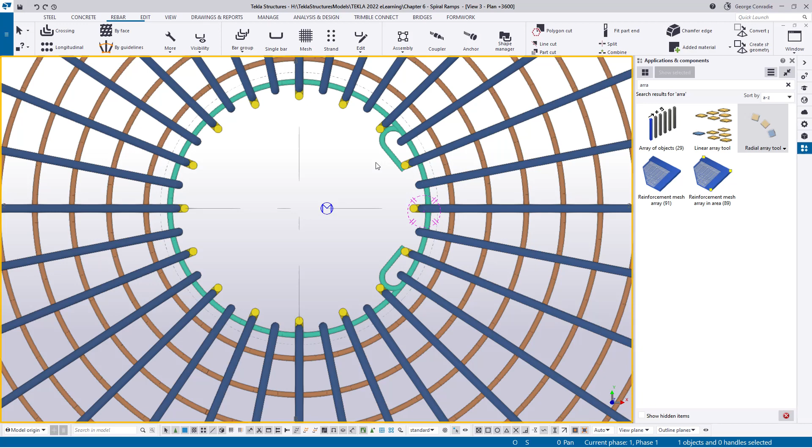And then if we look in here, Tekla has now generated these little yellow bars, and maybe that's not very clear. It's generated these yellow bars for us. Every second bar, it laps precisely as a crank onto these radial bars. And just like that, we've now completed our column with our cone and our top reinforcement.

So what I'll do, I'll go to view, and I'll go to view list. I'll open the rendered view, and I'll get rid of the other views. And now if we go into Control 1, so we only see the reinforcement, I'll also switch off my highlighter, and that's basically H toggles the highlighter on and off.

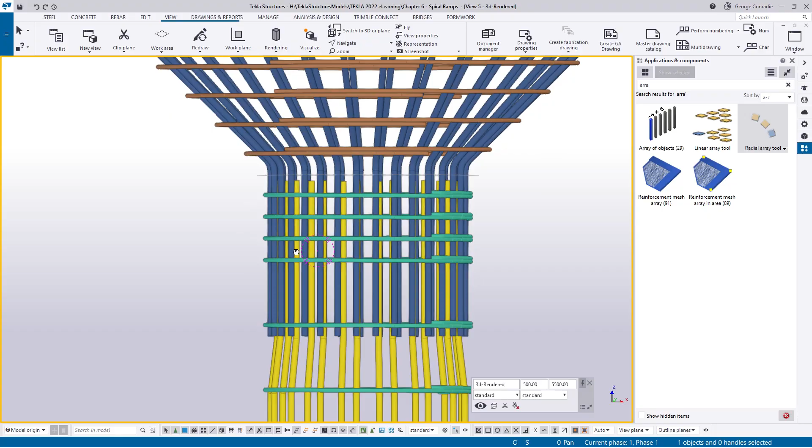We can look at these bars and we can see how beautifully they actually work. This sort of bar supports the top layer. It comes down straight and it cranks, it laps very nicely with the main column reinforcement. As you can see there, the crank really works well. And then we've got the stirrups for the column, tying the column nicely together.

We also have these two circular bars that sort of tie the cone together, and that's pretty much it. I mean, if you have concerns about the

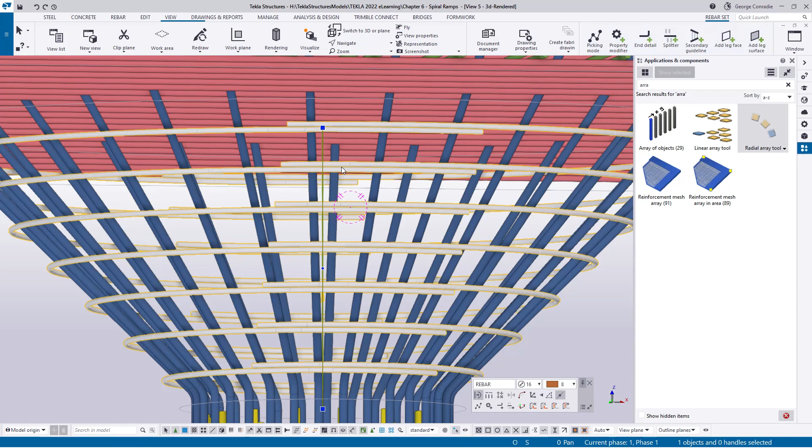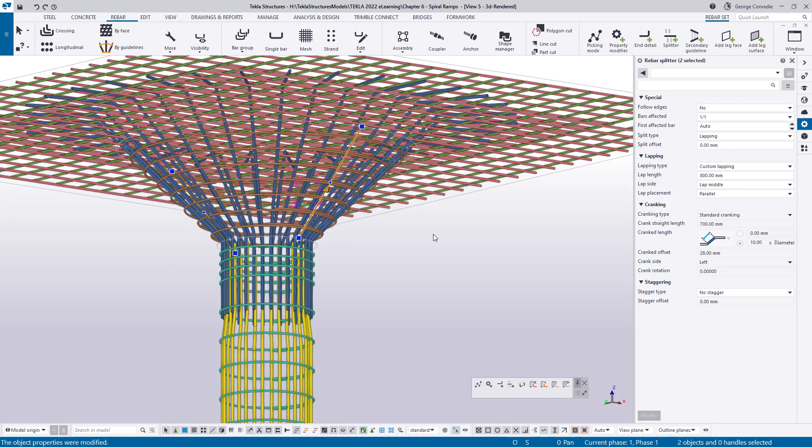conical bars, whether they will fit or not, what I always do is I'll just go to my rebar, and to the visibility, I'll make sure that I've got my splitters switched on. I'll switch off my guides, and then I'll grab these two splitters, and all I'll do is go to properties, and I'll take the standard lap and make it a custom lap, and I'll just give them a little bit of grace by saying, give me an 800 lap, please. Now what that does is it just extends the lap a little bit. So if they go up and down a little bit, they're not going to run out of minimum lap length.

So that's probably a good practice to do. It doesn't add any significant number of tonnage, I mean, it's really, you can neglect that, but it gives the guys on site a little bit of tolerance to work with.

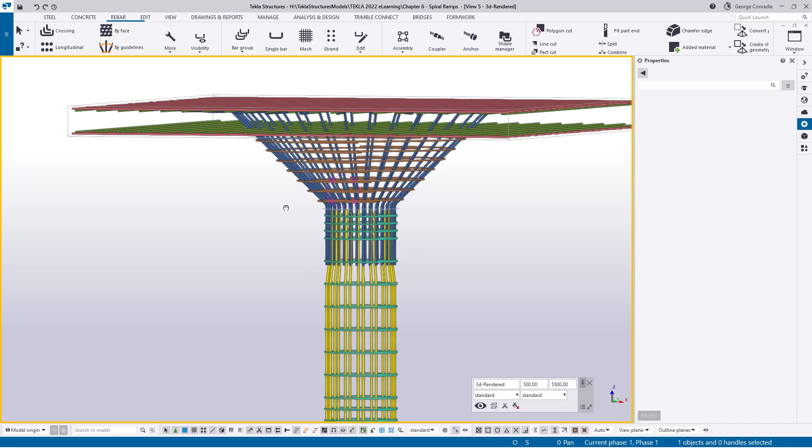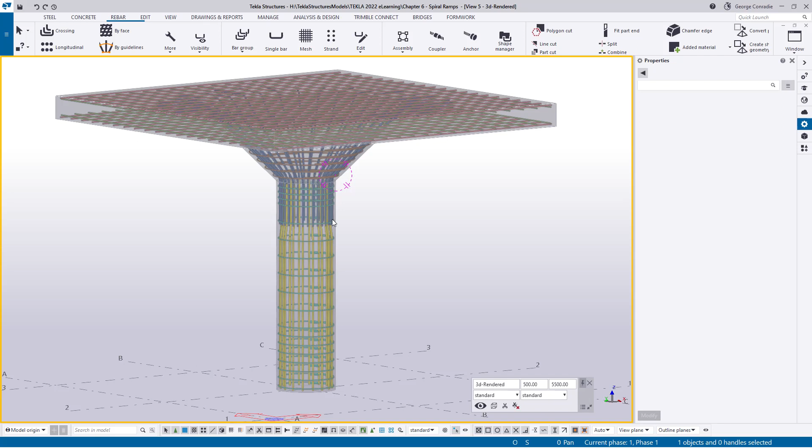But that's the conical column. I think it came out great. A very easy way to model it, and I hope at least from the techniques I'm showing you, you're learning something from this, and hopefully this is showing you how you can combine three types of reinforcement, namely single bars, rebar groups, and rebar sets to achieve a goal. Sometimes it's needed. I'll see you in the next video.